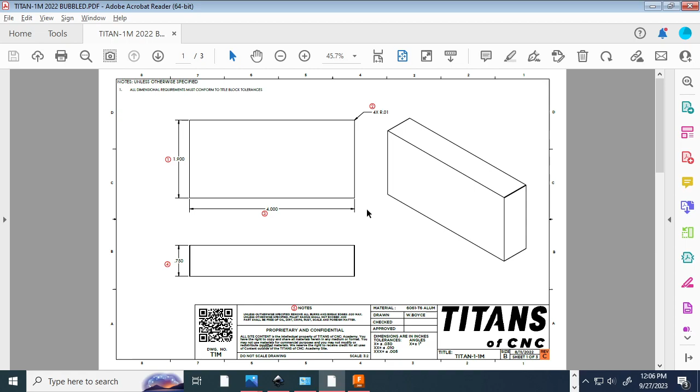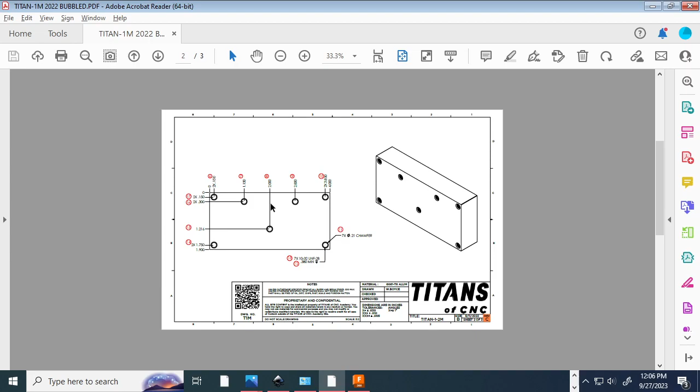Let's look at the PDF file. There's quite a few things on here that are going to be of interest, and I want to make sure we understand, so I want to see your eyeballs. There are 3 pages here. This is the stock, the main part, the original material it starts with. Then this shows the holes and where they're going to be. And finally it's going to show the pocket and how that works.

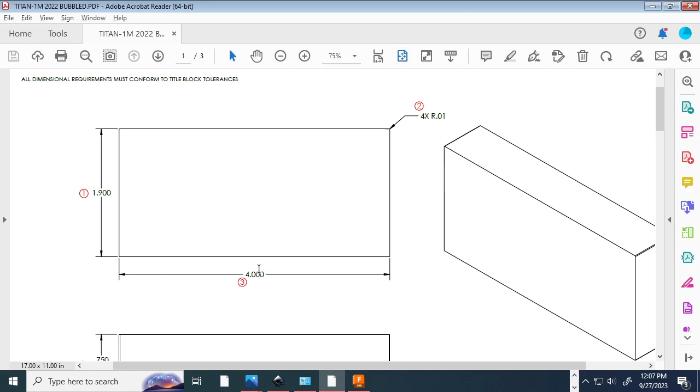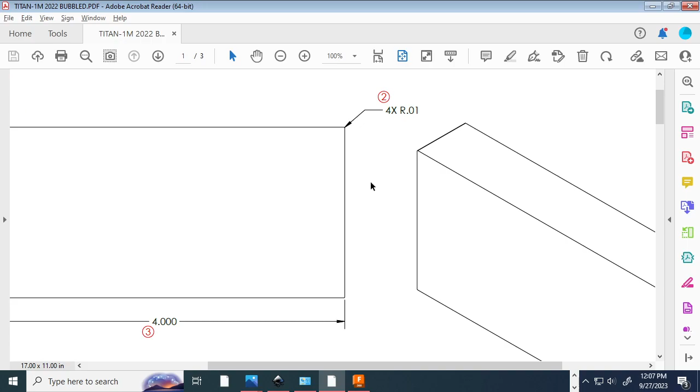Okay, so let's analyze this a little bit. Go into the first page. Obviously the part is 1.9 by 4. You may not have noticed this, but at the corner it actually has a note that says 4x, radius 0.01. The 4x just means that on all 4 corners it's going to be the same radius. It's not really obvious unless you see that note. You can kind of see they show it a little bit rounded off in this, but yeah, so that's that.

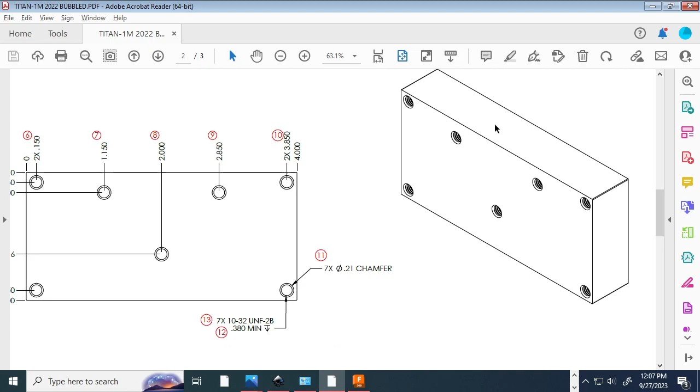Let's go to the next page. This is where it gets to be a little more interesting. One thing I noticed is those are threaded, so we'll talk about that in a second.

Just zooming in, notice the corner here, right? The corner says 0, 0. All right, and then it has what looks like measurements on every hole. The first hole, it says 2x 0.150. So what does that mean?

Let's look at the other one here. Let's look at the one that says 7. Those are just like identifiers. But this says 1.15. All right, and the next one it says 2.

Now notice, there doesn't really seem like they're measuring from in between these. What they're doing is using something called a baseline measurement. You can see this is 0, 0 up in the corner, and then they're measuring to each piece. So this is 0.15 away, this one is 1.15 away, the next hole is 2 away from 0. And you can see the numbers are getting bigger, even though the gaps are essentially the same. So that's one way you can tell that.

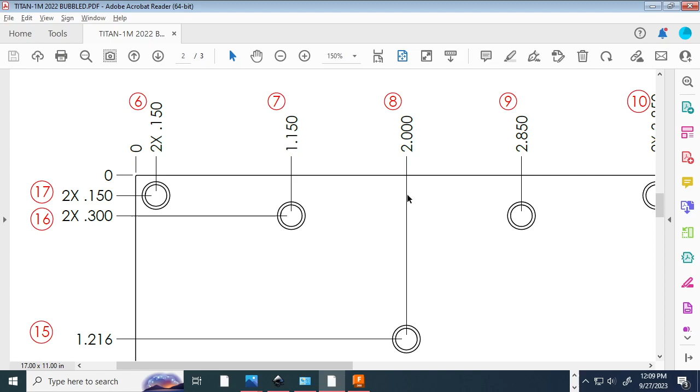And if we zoom out, it goes all the way over to here, and the last hole is 3.85 away from 0, 0. And if you go up and down it's the same way. So every hole has its own measurement.

You'll notice that if it has 2x, like this does here, that means that measurement applies to 2 different things. So for instance this 2x 0.3 just means it's working for this one and that one. So it's 2x, 2 items. That makes sense, now I'm thinking about it.

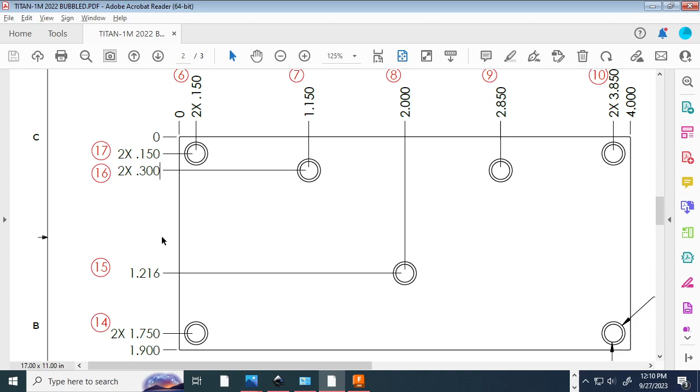This one says 2x 1.75. So that means this hole is 1.75 away from 0, and this hole is 1.75 from 0. All right, so those are baseline dimensions.

The reason they use baseline dimensions a lot in engineering is because it'll actually make it more precise in the end, right? So if you end up measuring from here to here, and then from here to here, and then from here to here, well every time you measure that, even if you're using a caliper and something pretty precise, it actually introduces a little bit of error, just a little bit, right? But all those little bits of error, they stack up. So by the time you're all the way to the end of the other part, it might be 0.01 off, which doesn't sound like much, but I don't know if you remember when we did the amplifier cases.

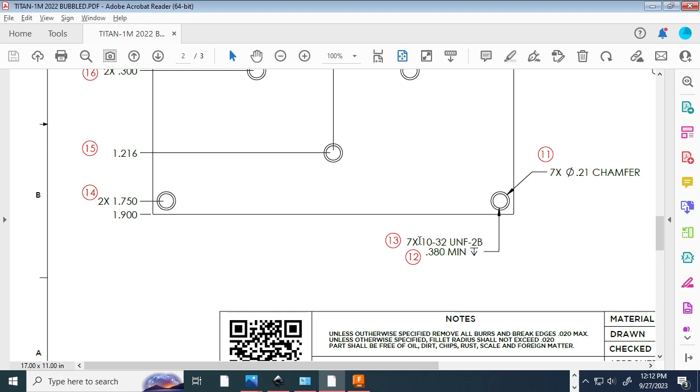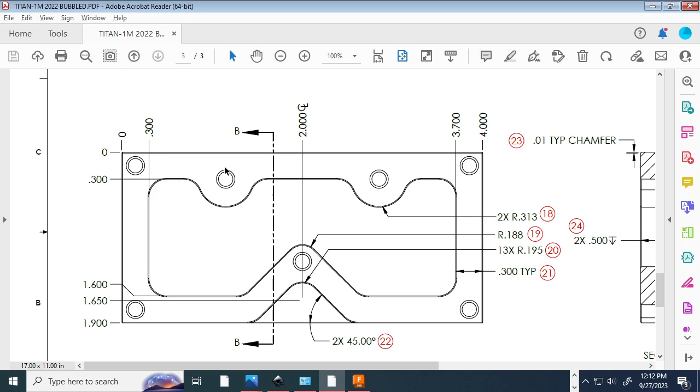Well, in my case, my one hole was basically a little bit off. I don't know if it was 0.01 or what, but I couldn't get the screw in there because it was just a little bit off. I was able to get 3 screws in, but there was enough wiggle room, and my measurement was just slightly off for that last one. So I had to just deal with 3 screws. That's not going to fly on really high precision things, because these might be going into a military application. It might be something that's very important, and these parts are relatively expensive to get made. They might cost a couple hundred dollars just for one part. I mean, it's really just a little piece of aluminum, but they're paying for the precision, the precision engineering and the precision manufacturing.

All right, so yes, I wanted to point out this too, over in the corner here. Whoop, oh sorry.

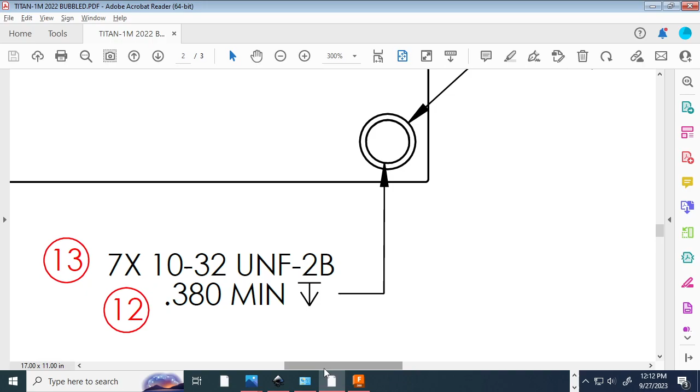Over in the corner, we have that hole. Now it says trying to get both. There we go, it says 7X, 10-32 UNF 2B. All right, so what is that?

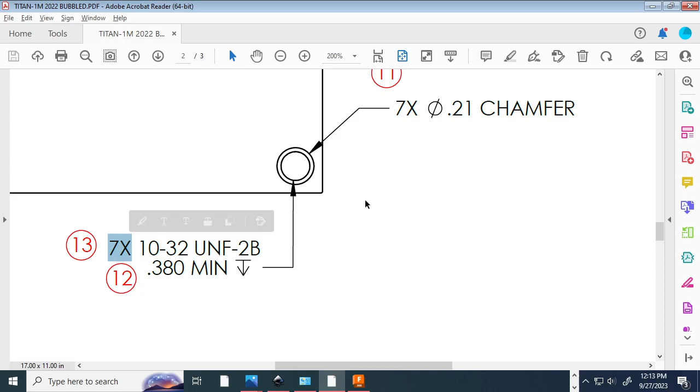Well, first of all, 7X means that's going to be for all 7 holes. 1, 2, 3, 4, 5, 6, 7. So that's what the 7X in both of these means.

Now this is your actual threading. If you wanted to look up what this meant, I have some in the books. You can Google it. I'm not sure, something like 10 millimeters and 32 threads per inch or something. Don't quote me on that, but I usually just look it up when I need to know it. All right, this will be an option in Fusion that we can just select.

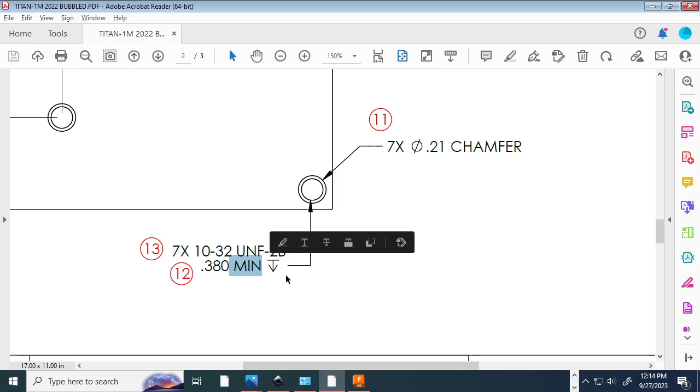So we'll get that. Now this right here, the 0.38 minimum depth, that means it needs to go down at least 0.38. Now when we're doing Fusion, we can make it the minimum, or we can even make it like 0.381 just in case. But this note is important for manufacturing, because if they go to check that and it ends up being smaller than 0.38 because of some kind of manufacturing error, then they should go back and either make it a little bit deeper or maybe edit the CNC program.

All right, so that's what this symbol means here. It just means that's 0.38 down from the top. So it's not necessarily a through hole, okay?

And then this 7X diameter 0.21 chamfer. So it's just saying that the chamfer is like a locked off corner. It cleans up the hole, helps it so the screw goes in a little easier. It's less sharp. All right, so we'll get into that.

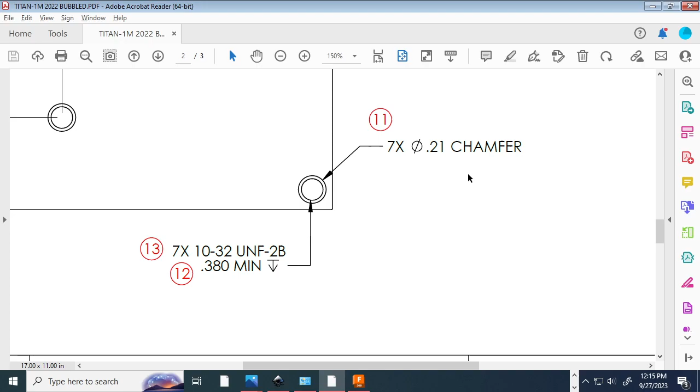And finally, let's look at this part. So you can see here in 3D how it looks. It's not going all the way through. It's more like a tub, which when we get into the manufacturing, this is going to be called a pocket. But yeah, you'll see it has a section.

So this line here with the B and the arrows, that means that this section over here was basically, if you cut this part in half and then looked in the direction of the arrow. Because after you cut it, technically you have two choices: are you going to look to the right or are you going to look to the left? In this case, based on the arrow, we're looking to the left. And that's what we would see here.

Notice you could draw where these lines intersect, and you can see anything that's hatched is solid at that part. Anything that's not hatched means it's not solid there, but if you were looking in this direction, you'd see these walls and stuff. It's not solid, it's not being cut through, but it's visible. So that's what we'll be seeing here.

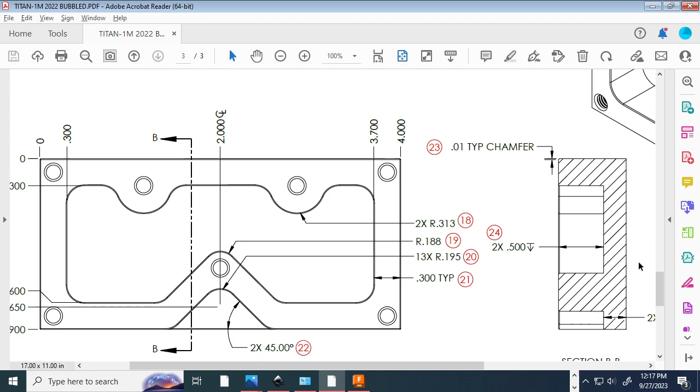It also tells you that this pocket is meant to be 0.5 deep. The reason it says 2X is because not only is it this section, but this section is also 0.5. Same here, you got 2X 0.25, that's there, and the 2X means it's also here. All right, they try not to duplicate unnecessarily.

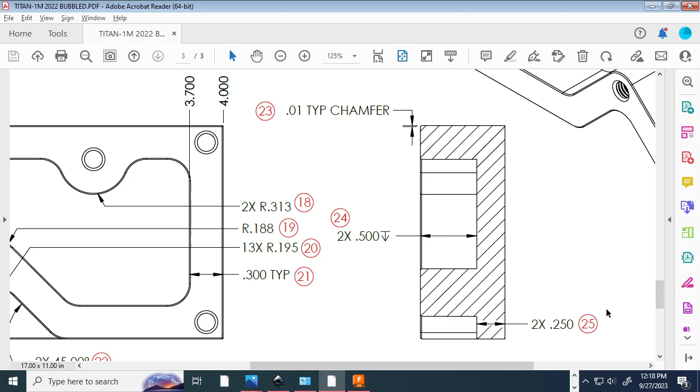So let's try to, if you see the R, or you see this 13XR, that means there's 13 points that have that same radius. Pretty much everything that's not labeled otherwise. Notice these two are labeled, one's 0.188, and the one back here is the 2x.

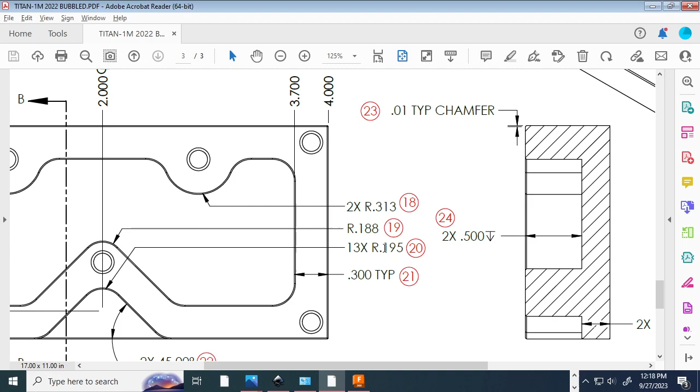Anything else that's not this, you'll see it has a note on it. In this case, that says 2. You've got to use your judgment, but it looks like the 2 is referring to both of these. We'll see how they do it in the tutorial.

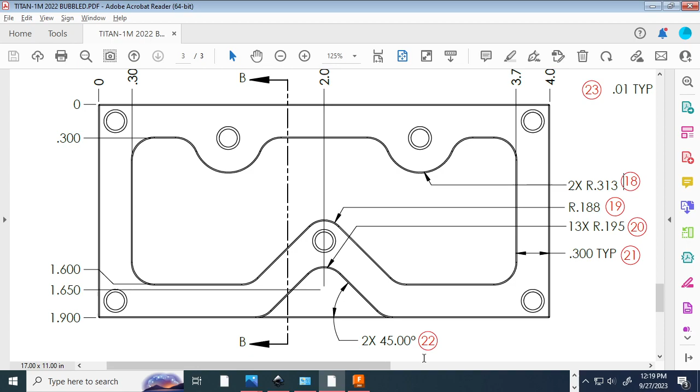I just wanted to point all this stuff out to you. The baseline dimension thing is pretty important to know, and knowing why we're doing it is pretty good, which is mainly for accuracy.

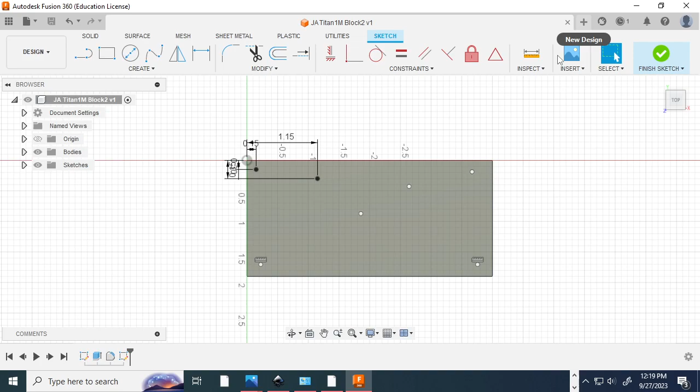All right, let's get into the actual tutorial. If you didn't already do so, open up your Fusion. And I believe I asked you guys to check if you're in inches rather than millimeters. But for the sake of the video here, I want to show you how to do that again.

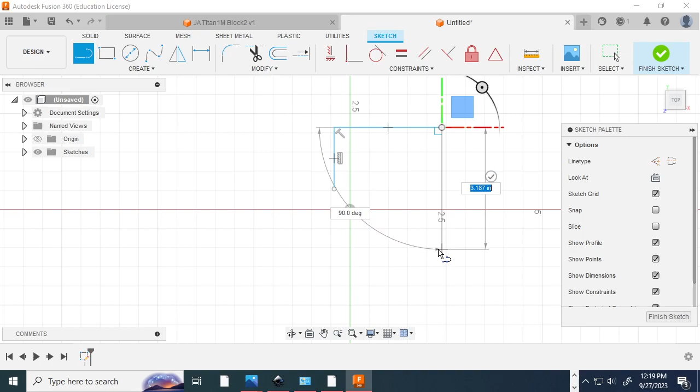To check it, you could start drawing, and you can see mine says it's in inches. So I'm good so far. I'm just going to undo that.

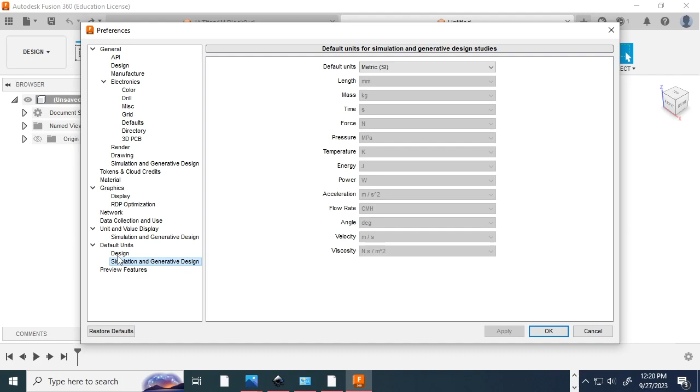If it wasn't inches, go to your account—might be your initials, might be a photo—then Preferences. When that opens, you'll see design units at the left. Make that inches. You also might see manufacturing, depending on what version you've got. If you see that manufacturing one too, make it inches as well, because that'll come in handy when we start the CNC stuff.

Okay, so now we're ready to start. What I do is generally have this up on the other window, and if I'm watching the tutorial, which is found on the link I put on Google Classroom, that should probably also be on the other screen. Now, I only have one presentation screen, so I'm going to try to skip between them. All right, let's see what this guy has to say.

Everybody, welcome to Titans of CNC Academy. My name... one second, I forgot to switch my audio over. My name is Billy Boyce, and right now I'm going to take you through modeling the Titan-1M.

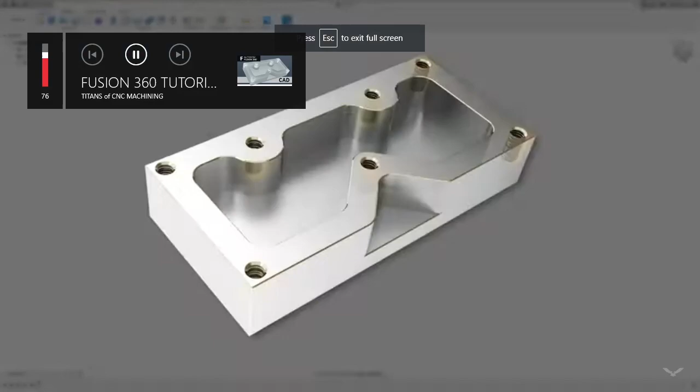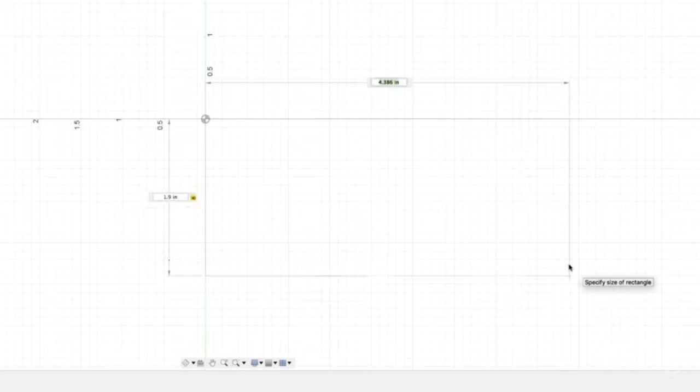Okay, let's go ahead and get started with sheet number 1 of 3. First thing we want to do is make sure we are in the design workspace, and let's go ahead and create a sketch. We'll click create sketch, choose this top plane, and go ahead and go to 2-point rectangle. Then we'll come over here and click right in the center one time, and drag over and down. I can see the green highlight in that box. We want to make sure that says 1.9. Then I'm going to press tab and say 4. Enter. Now I'm going to come up here to solid, say extrude, and then type in -0.75.

All right, so I just want to stop it there and take a second to catch up. I did notice that my view looked really janky, so I wanted to fix that. I'm going to hit Shift Tab and switch between the things I have open. All right, so I see my Fusion.

I actually love watching videos where I know I could do this on my own, but I like watching because I learn something new. This happens a lot—I did that a lot with Blender things too. I'll learn a new way, or get more understanding, and it's really good. Even though I know how to do it, watching other people is enlightening sometimes.

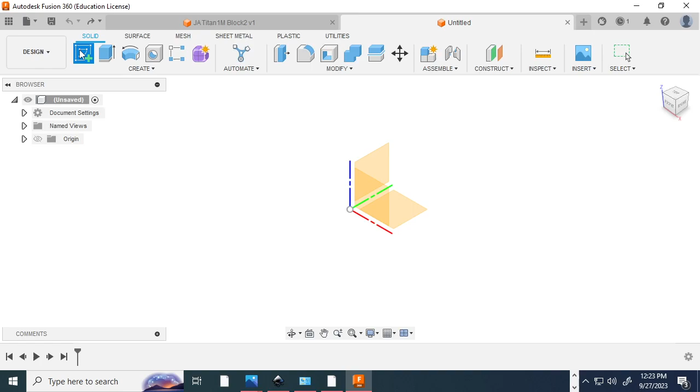So what he did was start a sketch, making sure he was on the top view, which you could tell from the cube I'm clicking on top. Notice that when he made this, I usually just use lines, but he did a rectangle. So he clicked on the rectangle and started at the 0, 0 point. That's the baseline when you're looking at the plans.

Instead of making this and then typing in the numbers, I believe he just typed them in directly. So what was this, 4, and then he hit tab, which switches it, and then I believe it was 1.9. I'm going to check that in a second, but then enter. Now we got that.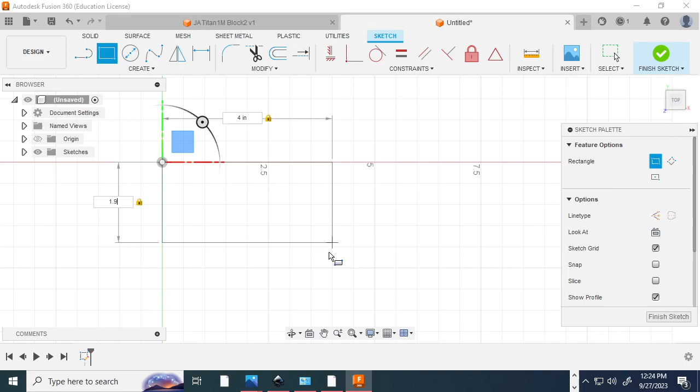So yeah, so 4 and 1.9.

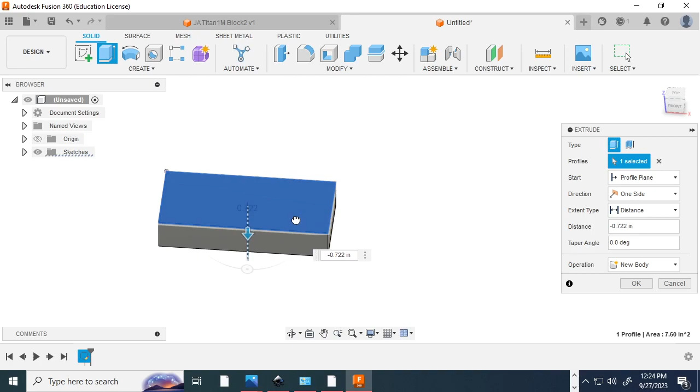Now instead of finish sketch, he just hit enter, or he just went into solid and then extrude. I almost always just hit finish sketch, but this works, and it just automatically kicks you out of the mode. I used to just push this down and then type it in, but he actually just straight up typed it without even touching the screen. So I'm learning new things that will actually speed this up, if I could type right.

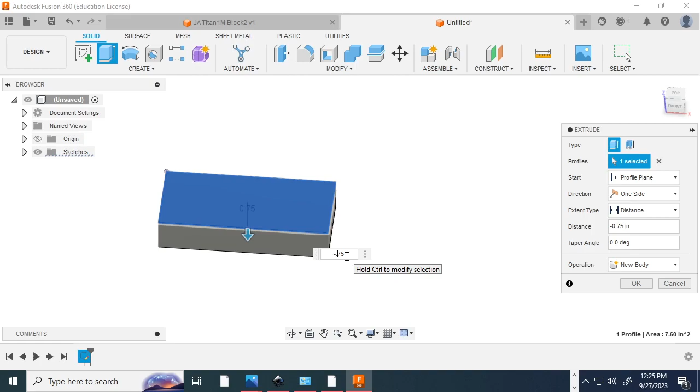All right, so negative 0.75, because he wants to go down. And now we are caught up.

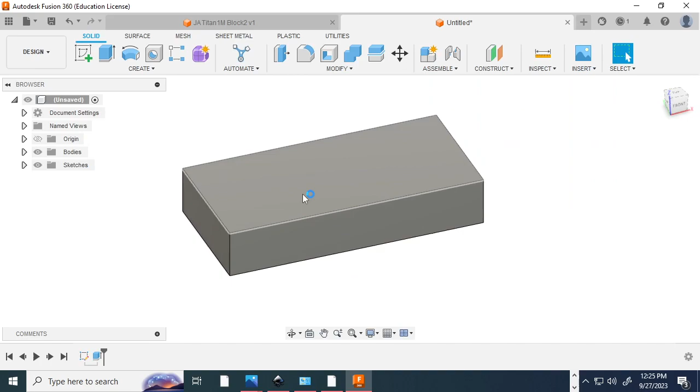Another thing he mentioned, or he will mention, that I learned totally new in this program: if your view is a little wonky, let's say you want this to be centered, you just double click with your middle mouse wheel, boom, boom, it just centers it. So cool, centered, and then when you go to rotate it's perfectly centered. I never knew it was so easy, you just double click with your middle mouse wheel. Thought I'd make that known.

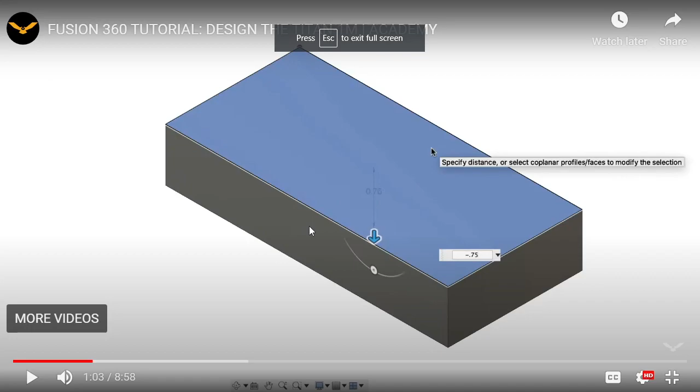All right, back to the video. Enter. I'm going to go ahead and double click my center mouse button and it should bring it right back in the center and in view.

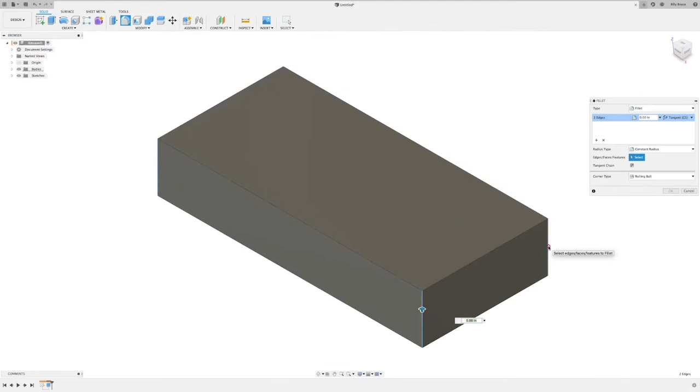Now I'm going to come up to fillet. I'm going to go ahead and select the 4 corners. I am able to select through the part and get that other corner. And that's going to be a 10 thou, 0.01. Enter. And that finishes off sheet 1 of 3, so we can go ahead and move to sheet 2 of 3.

Before we get too far, I'm going to catch up.

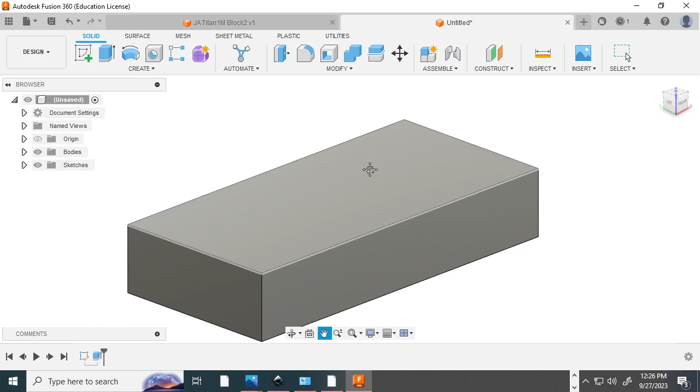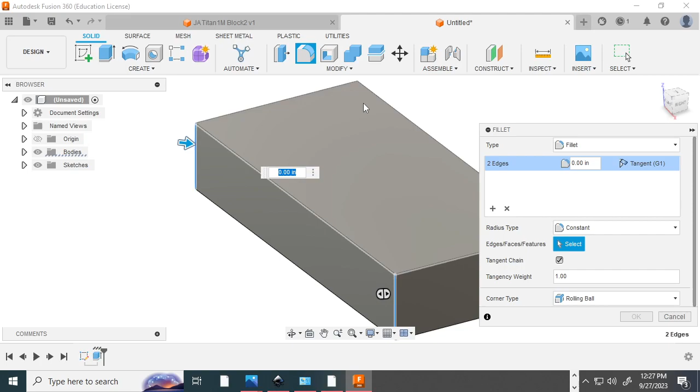So he just used a fillet, which is up here. I learned something - I might not have forgot it, but if I click on fillet and click on all 4 of these, you'll notice this one you don't even need to rotate for. Like he said, once you're in the area, you can just select it. So you can see over here I got 3, now I got 4, and I can just type 0.01 and enter.

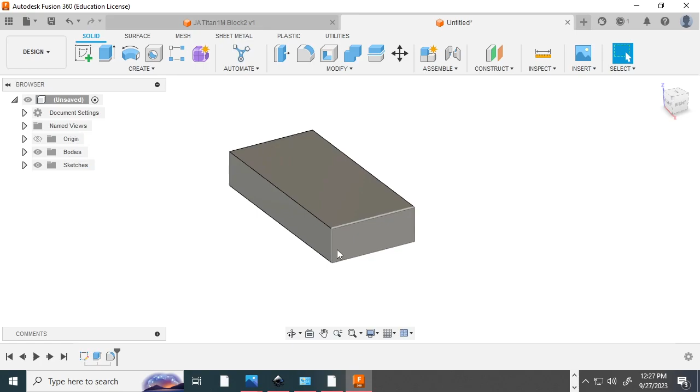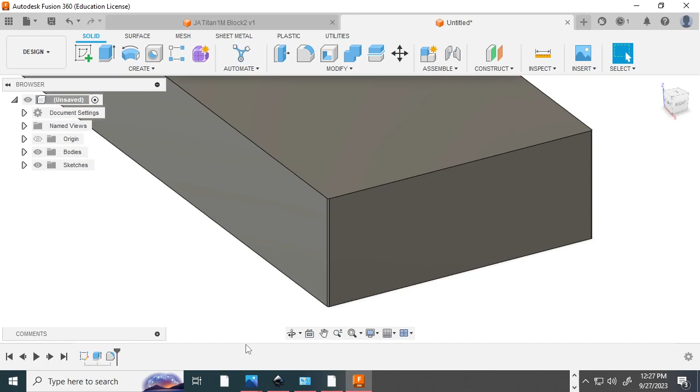Now, at this point, I wanted to point out a function of the software you may have forgotten about, which is at the bottom here, our timeline. So obviously we just did that fillet, but this timeline has a record - we did a sketch, we did an extrude, we did a fillet. Now if I move this back, you can see it undoes certain aspects of it. So that will be useful in the future, but also you can double click on any of these and go back and edit it.

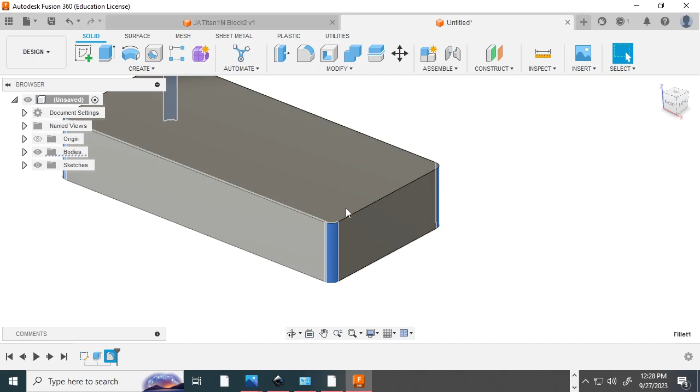So let's pretend I had the wrong number in there. I thought I typed it right and I was looking at it like, well, that's obviously different. So in order to fix that, all I have to do is go back down here in the timeline, and you can see it highlights it when you click it. But then you just double click, and I can simply put that new number in there.

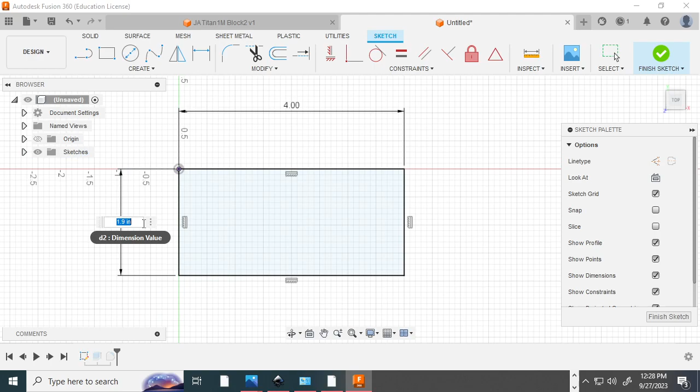All right, and that works with everything. You could go in and edit your sketch - perhaps I had this at something crazy, right? As soon as you hit OK, it actually updates it, and it still has the stuff after it, like it still has that fillet and stuff. So obviously that's crazy.

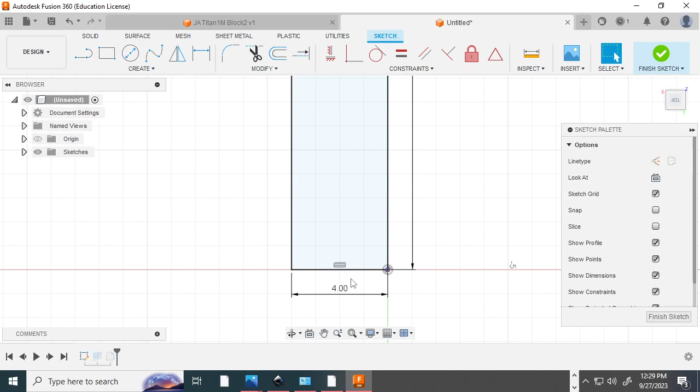I'm going to undo as much as I can. Control Z, back to normal. Okay, so we're going to continue with the video.

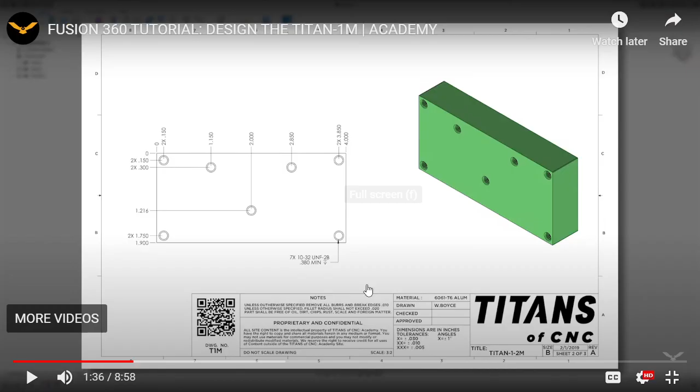The holes. So let's go ahead and come up to create sketch. We'll choose that surface. Go up to create and point. I'm going to go ahead and kind of drop down all the points roughly in the same pattern as the print, and now we'll add some dimensions to that.

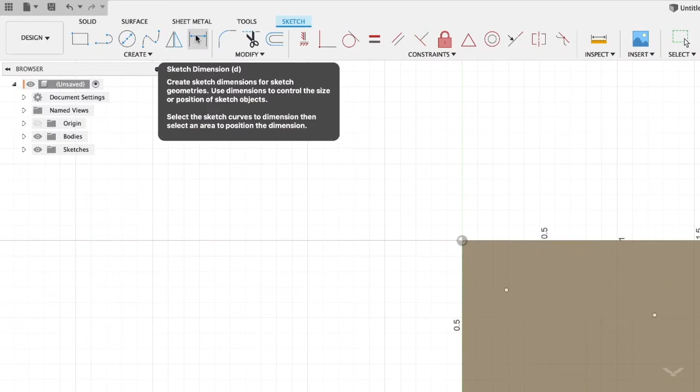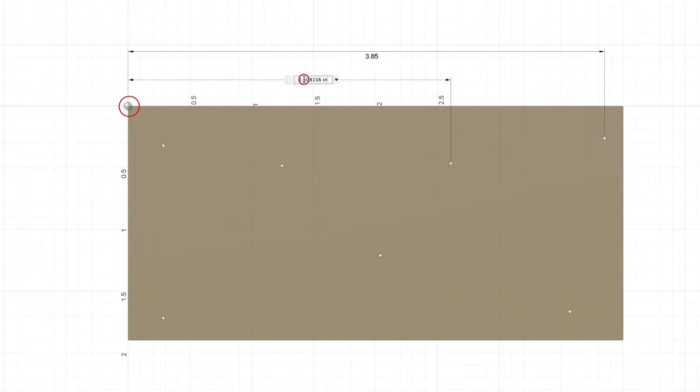So we'll come up to sketch dimension, or you can just type D on your keyboard for dimension. I'm going to go from the center point there, or our edge, to that point - that's going to be 3.85. Enter. From here to here, 2.65. From here...

Okay, I'm going to pause this for a second because I believe we can extrapolate what we need to get on our own at this point. We'll kind of skip forward.

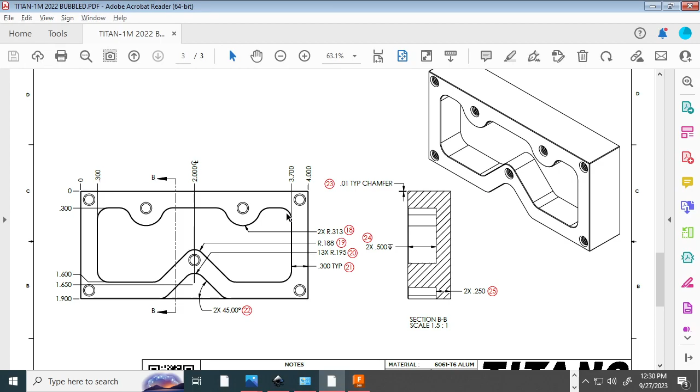So obviously he's looking at this in his other window or somewhere else, but you can see there are 7 points. He put the points down first, just eyeballed where they're going to be, and then started doing all the top baseline dimensions. I wanted you to know that everything has 2 measurements. You could do the 2 measurements for this hole, the 2 measurements for this one. Of course, there are many ways to do this.

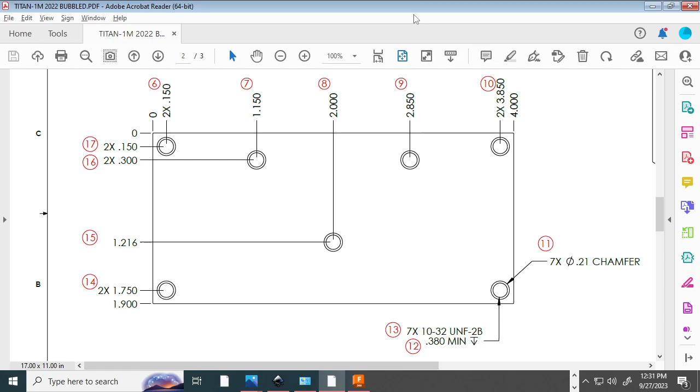I'm going to try doing it the other way real quick, just so you can see how this is going, because you can pretty much complete this, at least this section, just using your own brain. So I'm going to start with my sketch right on the top, which, by the way, I had rotated. Let me fix that.

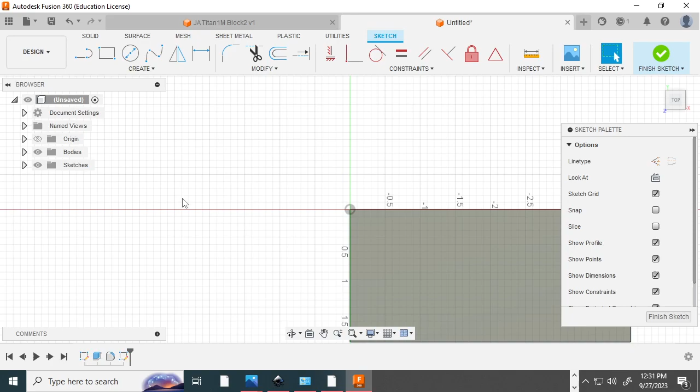Sketch on the top. I'm going to use points, which I haven't really used before. I used to just draw the circles and then move them. So this is pretty cool. We're going to do point — I think I hit the wrong button.

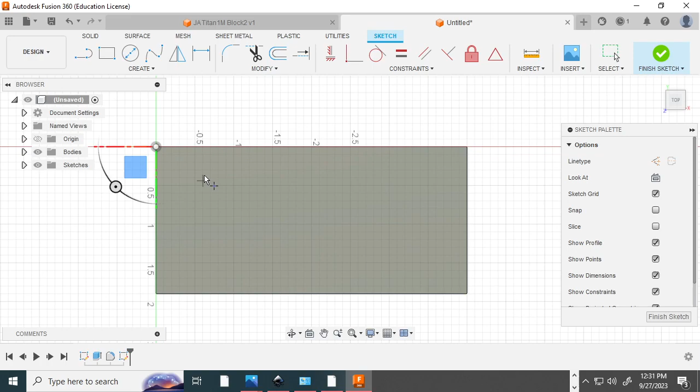Alright, I'm just peppering these where they are. So I know there's 1 here, about 1 here, about 1 there, 4 at the top, or 5 at the top, and then these are lined up. If it lines up automatically, that's fine, because that's how they are in real life.

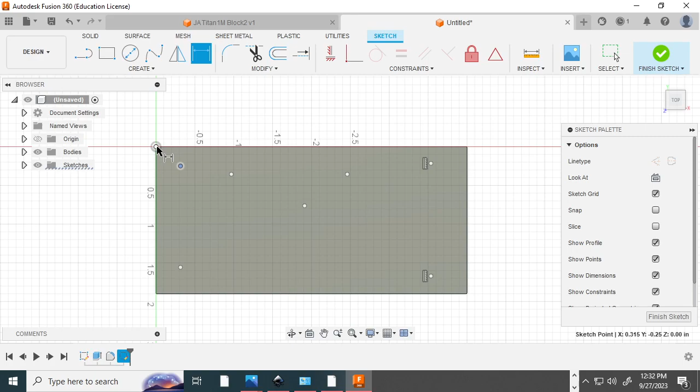And shortcut, you click on this — it says the shortcut is D. Let's just start getting this stuff in. Alright, I got from here to here, and for that it was 0.15.

And if instead of just doing all the top, I could just do 2 for each point, and that was also 0.15. Either way is fine. I'm going to continue.

Now, if these get in the way at some point, you can always move them. This one says it was 1.15. And from here to here, that was 0.3.

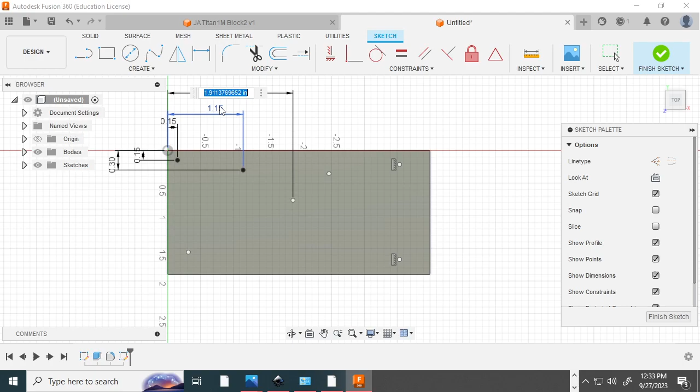Now, if you guys wanted to start doing this on your own as I'm recording it, that's fine. If you're following this video, you could kind of skip past this if you get the gist. Sorry, that was 2.

And this is 1.216. If I could type right, that'd help.

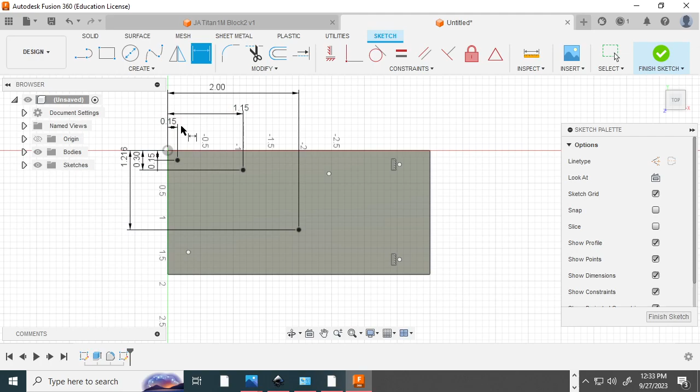Yeah, and as you start to get more and more, you might want to move these. These are really for function, not necessarily for documentation for people to see. So if the dimensions aren't pretty, that's okay.

Alright, so I want to get to this one. Remember, we're measuring always to the 0,0 point. And make sure your dimension doesn't go aligned at a weird angle — it's always vertical or horizontal. Horizontal, that's a good word.

Alright, 2.85, and this one is 0.3. Put that there.

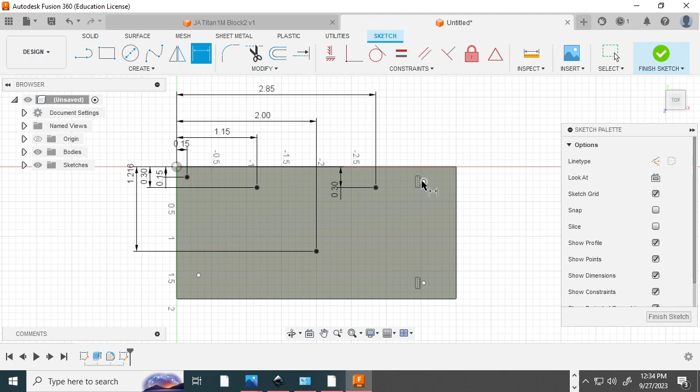Okay, this last one is 2.85. And from here to here is what? Try that again — from here to here. Alright, 0.15.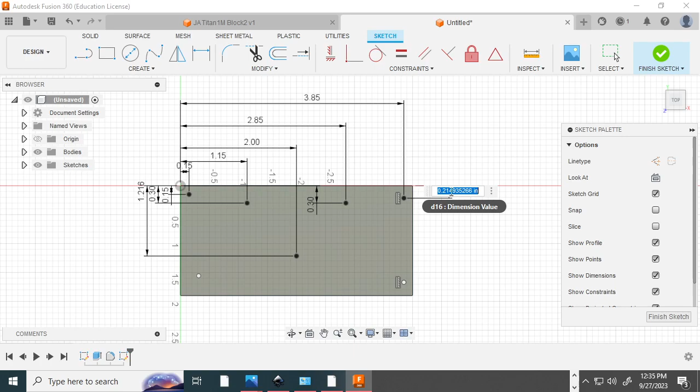Okay, I just gotta do these. 1.75. And that is 0.15 away from here. Okay, 0.15.

Come on. 1 point, 2 point.

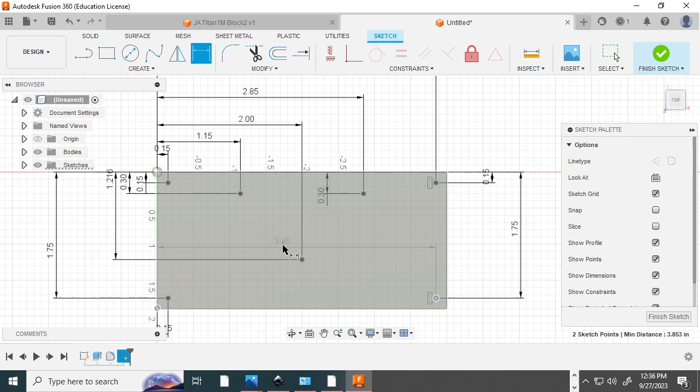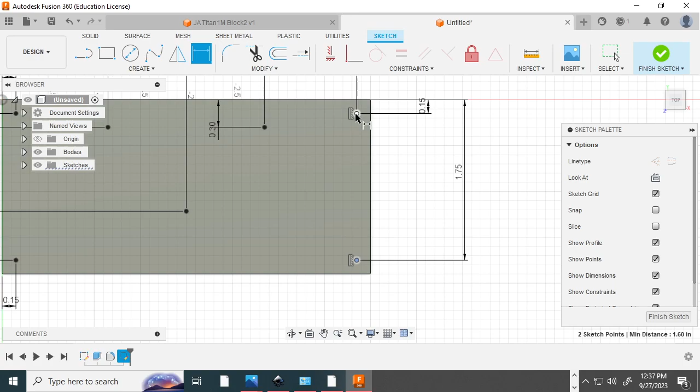Yeah, that's correct. If you guys see an over-constrained sketch, it either means there's already a dimension on it, or in the case of this one for me, what happened is when I drew the point, it knew to line up with that one. So it's always going to be in line with that, and it knows it has the same measurement. You can see this symbol — that means vertical, it's lined up vertical. We can always get into the constraints later. I think we have in the past, not this year, but yeah.

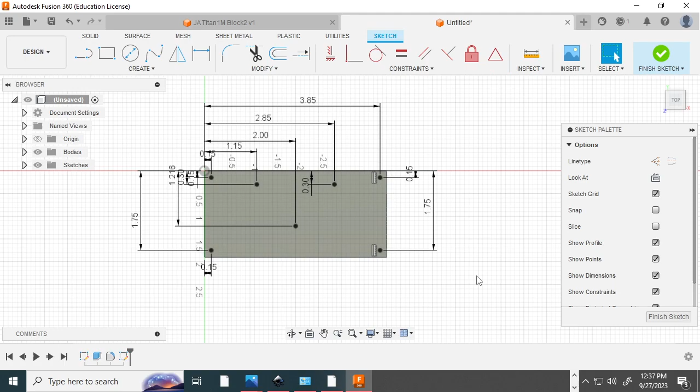So I got all mine. I'm going to hit OK, finish sketch, and that's really all I'm going to do today. So if you get to this point, we're doing pretty good. You guys are welcome to watch the other parts of the video and try to go ahead. That's fine. As far as me helping you right now, I'm going to make this maybe a 2-part lesson.